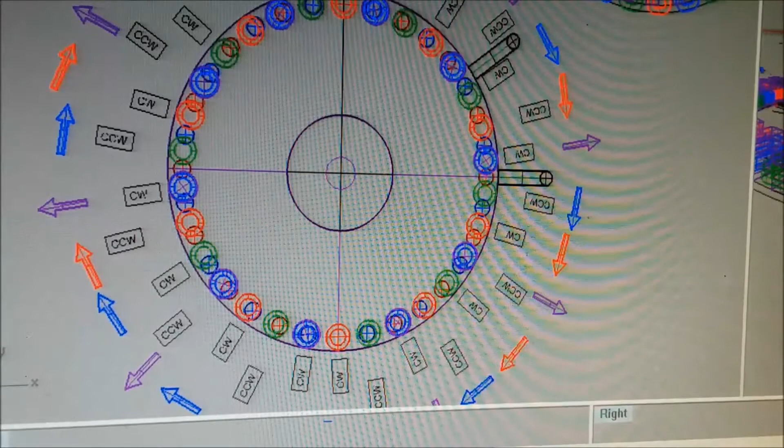Okay. There are a lot of ways that you can connect coils. The easiest is hook it up in three-phase. You buy a three-phase rectifier to turn it into DC. And that won't work to make an AC welder into DC. I've tried that, because it switches internally, and sometimes things are positive and some things are negative. What's the one you can use?

Well, I tell you, if you buy a three-phase bridge, it works, no problem. You can get it for any kind of number of amps you want. Because people are using them in small quantities, the price is kind of high for what you get. It might be $18 or $20 when it really should be $2. But you know, as a percentage of your project, it's not that much.

Other ways to do it. Back in high school, you remember the Wheatstone bridge? It's 4 diodes. The top 2 pointed up and the bottom 2 pointed down. And it's a diamond. You have the 2 wires on either side come out DC, and the 2 wires top to bottom coming in is AC. So it either comes in, goes out this way, or it comes in and goes out that way. And the other, like the negative, does the same thing on the other side.

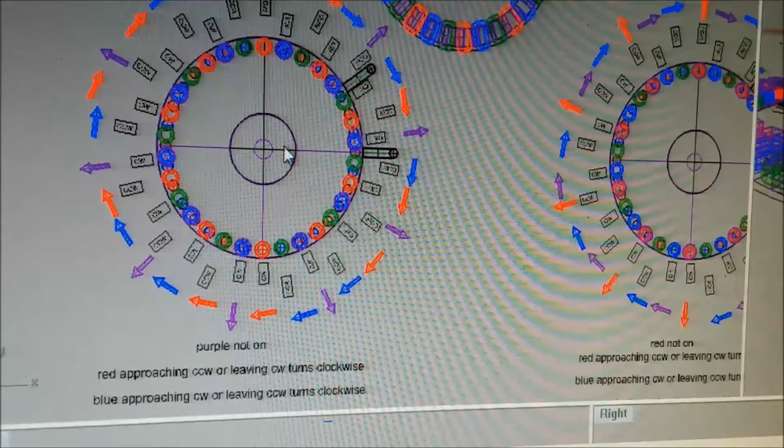And actually, the turbine itself is on 2 Chrysler front hubs, like you use for a van. They're only $16 nowadays if you get them without the toothed wheel for anti-lock brakes. They're kind of obsolete. They're about $40 if you get them with that sensor on them. Still not much. You get 2 sealed ball bearings, a malleable iron housing to mount it with, a 5-bolt flange like you put your wheel on.

I mean, you got holes to bolt it down, and you got something to put your rotor on. What else could you ask for? Put one on either end, you're golden. And you can take a 2.5-ton van and cut a corner with it in town, and the wheels don't fold over. So it's plenty strong enough, and it's cheap enough. I bought a couple spares when I got it.

Anyway, Wheatstone bridges will let you turn whatever the coil is doing into DC. Doesn't do much for you if you're trying to send AC to a 3-phase rectifier, because it's going to be coming in as DC. In fact, you probably wouldn't like it.

But you can wire these rectifiers in series. You have the positive and negative DC coming out. Well, positive of this one goes to the negative of another one. You go right around the wheel and hook them all together into a string, and then you only have 2 wires going to your batteries.

And I'll guarantee, absolutely guarantee, that will make more electricity for the same amount of torque going in than any other way you can do it. I know people don't do it that way, but if you watch this channel, you'll find I do a lot of things other people don't do. It's just the way we roll around here.

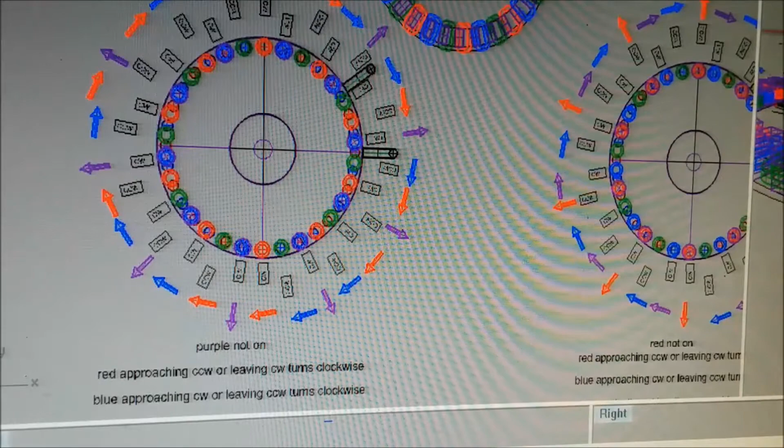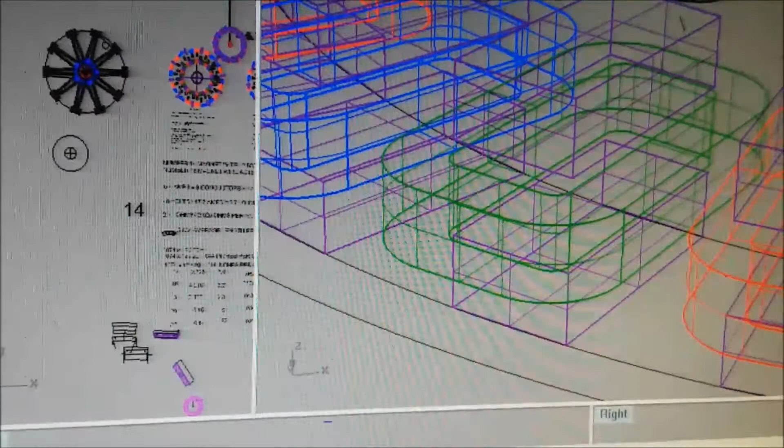This is looking down on my bracket that holds my fan to the ceiling. Let's see. What did I do?

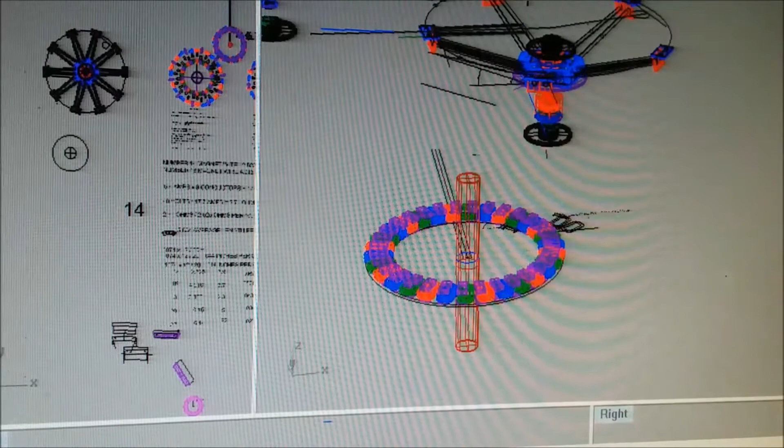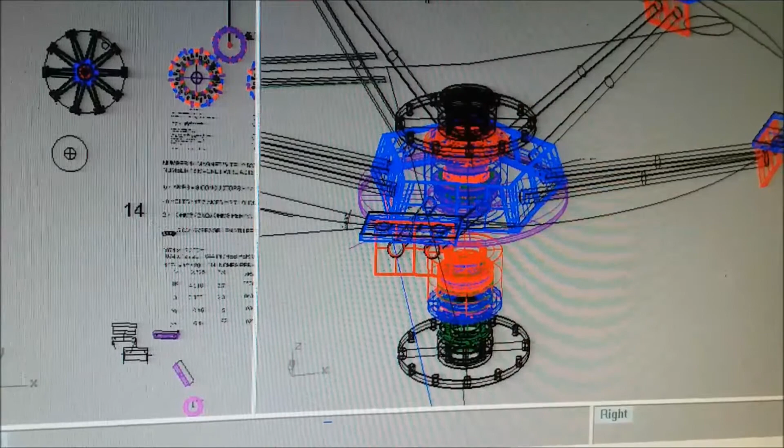Being that these rods were designed to be double nutted, I could line that up in and out, loosen the bolt, slide it left, I could get it bolted to the ceiling. However, no, that's not either.

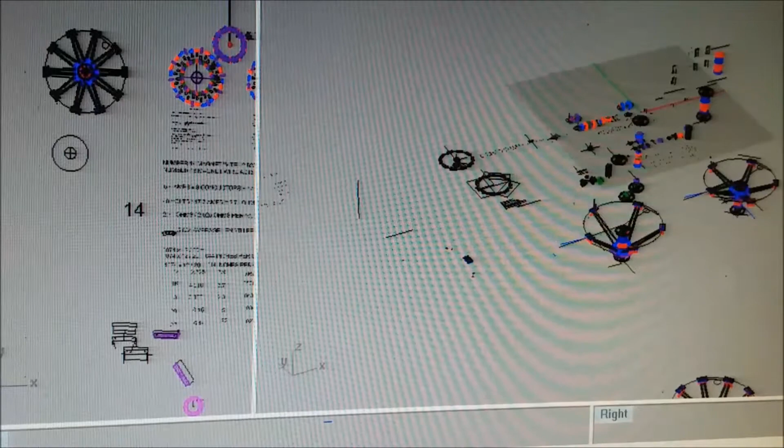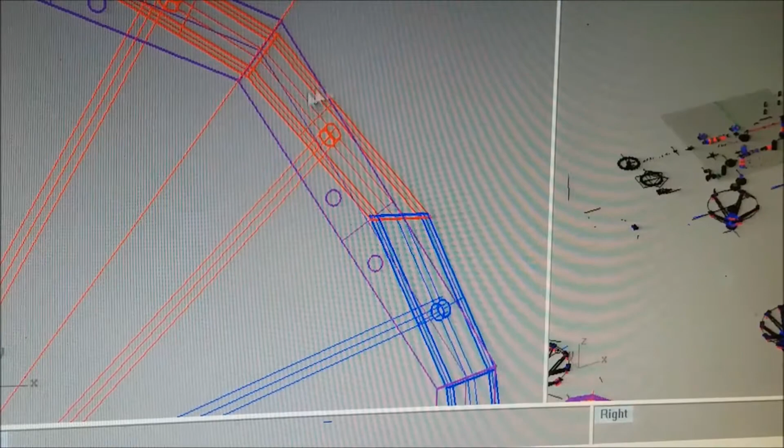The purple things on the top are the part that bolts to the ceiling. They're just made longer till they butt up, and it gets 2 for the upper flange and 2 for the lower flange. Looks real similar. And the flanges, they changed from 5 sides to 10 sides.

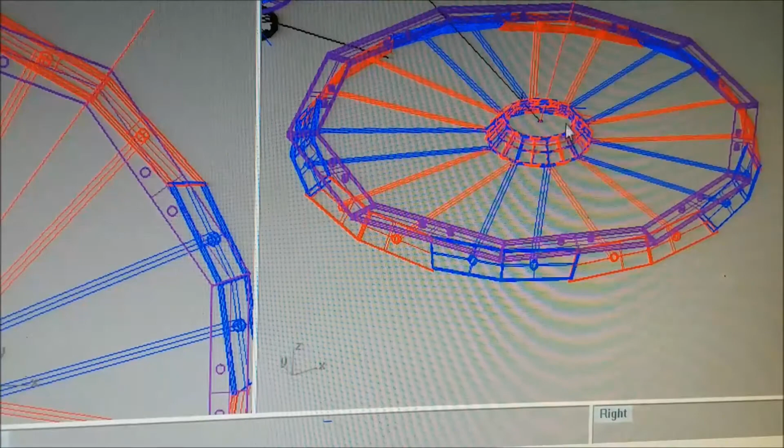Looks much nicer and easier to build because this center hole is bigger where it welds on, and that would be night and day different as far as assembly. We have the skirted things made and all the machine work for the bearing housings except for the grease fitting holes and a few things.

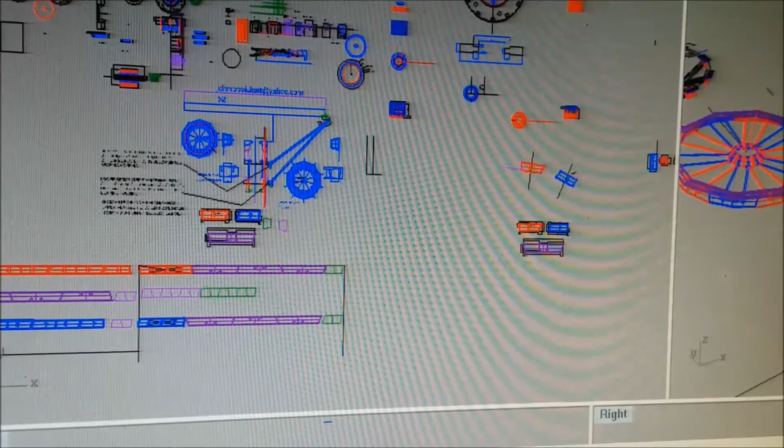This is cross sections of the stuff that makes up the bearing housing up here. It's got a big Timken bearing. That's the inner bearing of a tractor trailer. Turned out that it was about 30% the price of one either side of it because they make so many of them. Same brand, same quality, same construction, same materials, just a slightly different size. And you're making the housing, you pick the cheap bearing and buy a spare.

And because this fan blade is pushing up, the air is trying to push the blade down, and that's why the big bearing's on the top. There's another Timken bearing down here because you have to have Timkens in pairs to keep them loaded into the race so it won't just walk out of the race.

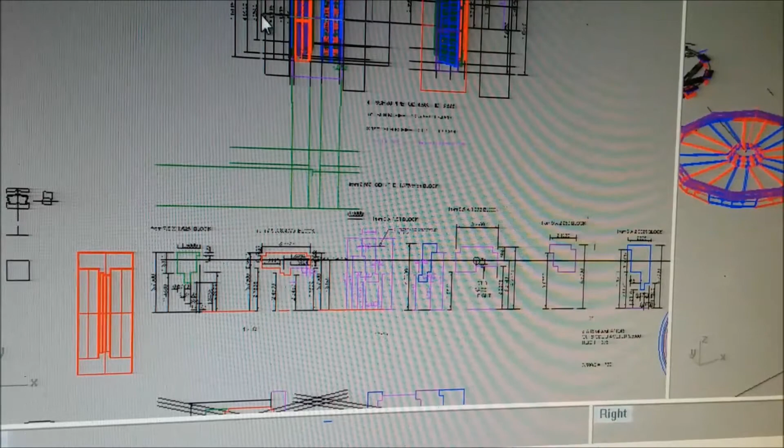And there's a sleeve on here with 2 W nuts, around 2 3/4 shaft size at that point, with a locking tab that you bend over into one of 4 slots on the nut. Same thing at the bottom, except there's no locking nuts. The shaft has got a step in it because this bearing goes on from the other end. And there's also a spherical bearing down here that takes the radial loads.

Things left to do are drill a hole through here where the 2 lines are, and put a grease fitting with a metal pipe up through the roof. And when you put grease into a Timken bearing, it climbs into the rollers and tries to get out the other side. So what you put in will flush out any surplus grease and put the fresh in place of it. And it will only take what it needs.

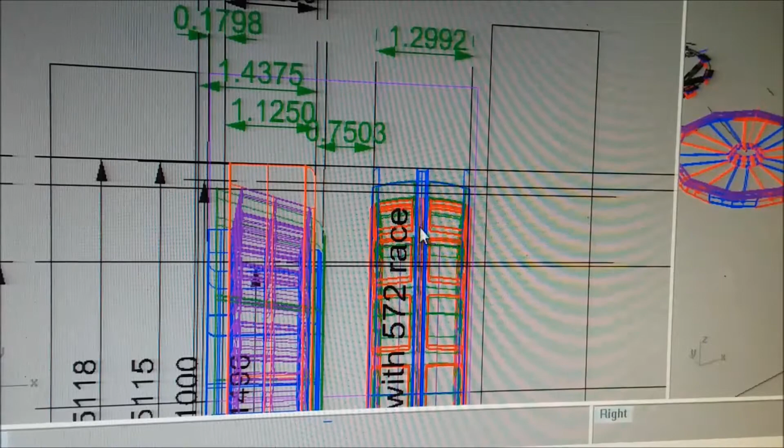A spherical, it's all trying to get back to the center. So they come with a groove around them. So we're going to drill right into here, put the grease fitting, and put it through the grease groove that's made for the grease. Fancy that. We're going to actually use something the way the manufacturer intended it.

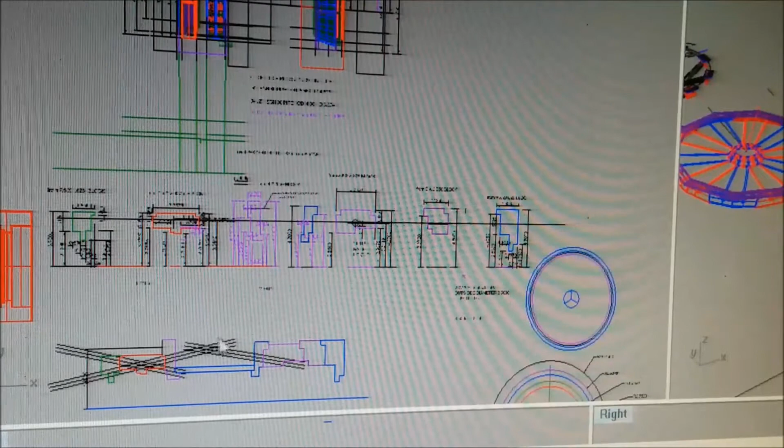The reason for all these pieces is you have to slide things in from the end, like bearings have to go in and, you know, somehow get in there. The other is you can buy from Blue Metals, you can buy pieces of ship propellers and stuff that they've chopped up. Also, when they take new material, the first part that goes into the rolls when they're rolling or forging that material may have a different grain structure than the rest of it, which could be 80 feet long.

So they'll take a 2-inch cut off the end to get it where it covers the entire diameter, and then they'll just lop off some amount, anywhere from 1 inch to about 7 inches. And at the other end, they take a cleanup cut, and whatever's left, they chop that off. So you get all kinds of different lengths available. It's hard to buy mild steel from those people.

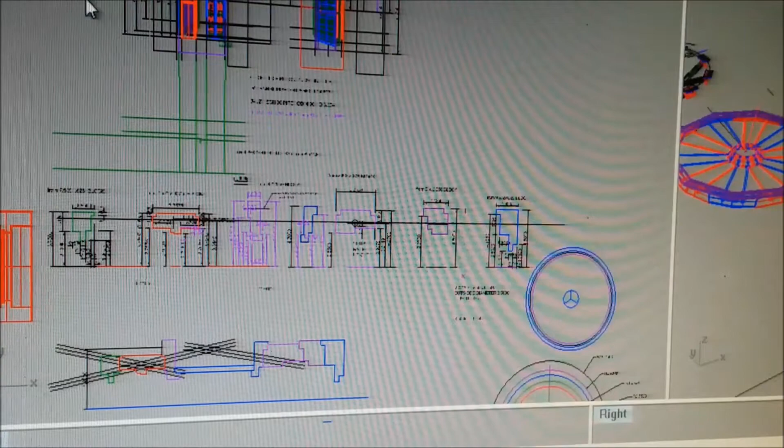But these pieces are 4340 and 4140, and stainless steel 316, and one of them is aluminum up here. It holds a grease seal. All the weight's going that way. This one down here is stainless steel, and like I say, these pieces are all made. Got them made in the Philippines, and he did a great job.

The flange that the fan blades are going to bolt to, they bolt to these holes out here. These holes are drilled, but I'm only going to use the outer ones because the fan blade goes clear across. And this is a size E hub also, with a quick detachable hub on it. And the hubs are phased so that the open hole on the other one is here, so you can thread a bolt from that side into this. And this one, you'll be able to thread a bolt from this side into the hub on the other side. So when you tighten the bolts, it pulls all of it together.

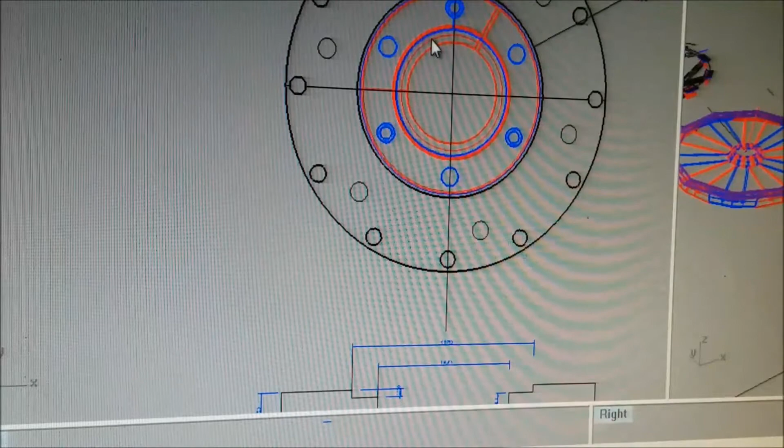Just worked out that way. Some brands, these haven't got equal spacing. They only have 2 pusher holes, so the patterns are offset. I got lucky. I got some that the 6 holes are all, you know, phased the same amount.

Just like high school. You know, they call it laws of physics. It's not a suggestion. Suggestions, you have a little leeway. If it's a law of physics, no choice. It only works one way.

Anyway, you can put 1 phase down, see what's happening. You know, as for insight into how these things are wired internally, Electro Noobs. N-O-O-B-S, Electro Noobs with an S on the end.

He's got all kinds of electronic projects, mostly all electronic, some mechanical. He's into drones and RC airplanes and motors in general. And he's got a real good explanation on how to drive motors and whether you want the MOSFETs or the other two choices I don't want to get into right now.

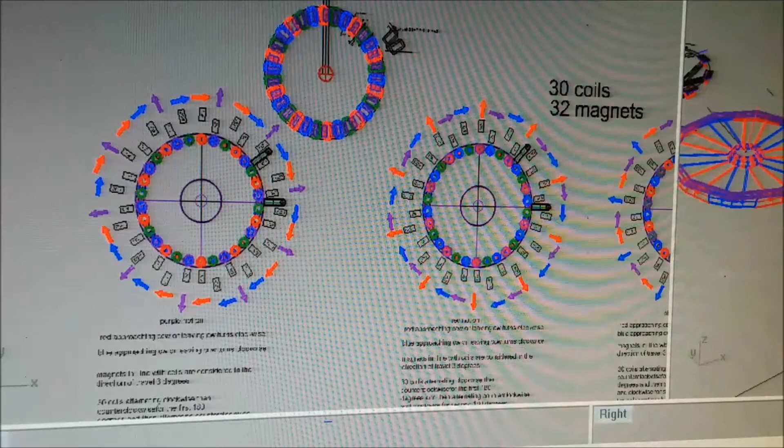You can't violate that. That's why you might have a motor that draws 6 amps and you've got a 300 amp capacity MOSFET driving it, or 4 of them in parallel driving it, because you can't violate the thermal part of it. So draw your thing, count how many coils you got in each phase, and you're going to go in on one set, out on the other. So the number of coils in 2 phases is what you're trying to figure your wire for.

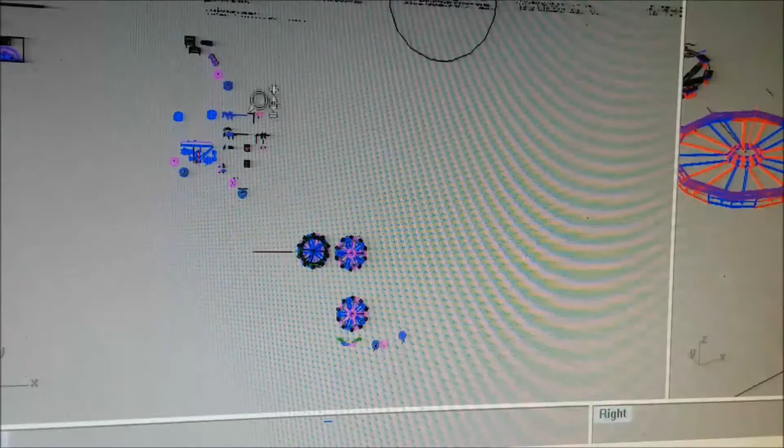There's a chart. Wait a minute, if I don't go too far, it won't do a redraw. This chart's got 40 lines in it. This is getting down near the bigger stuff, but there's a lot of them going the other way. A lot of ceiling fans are like AWG 35.

So you pick an AWG wire gauge, ohms per 1,000 feet, amps that wire will carry, and the diameter of the wire. You do your calculations for the one that you think is right, and then do one on either side of it. If the one on the other side looks like it might be close or maybe better, do one more. Get the one you really want in the middle and see what happens on either side. These wires come in 16, 17, 18, 19, 20, 21, 22. There's some not drawn in here. I can zero in on it because I haven't bought the magnet wire yet.

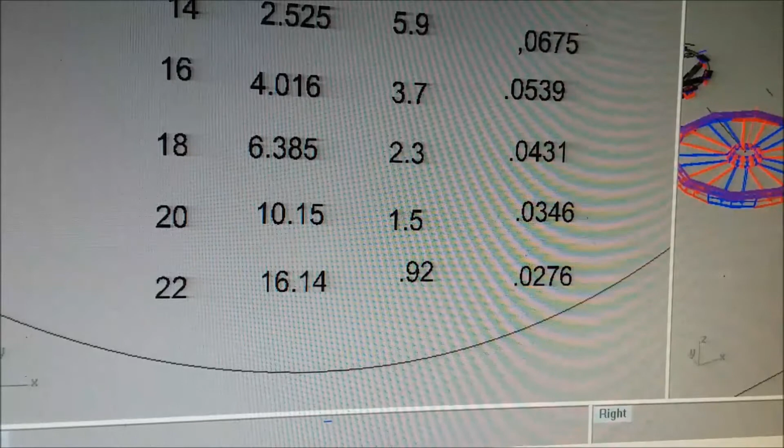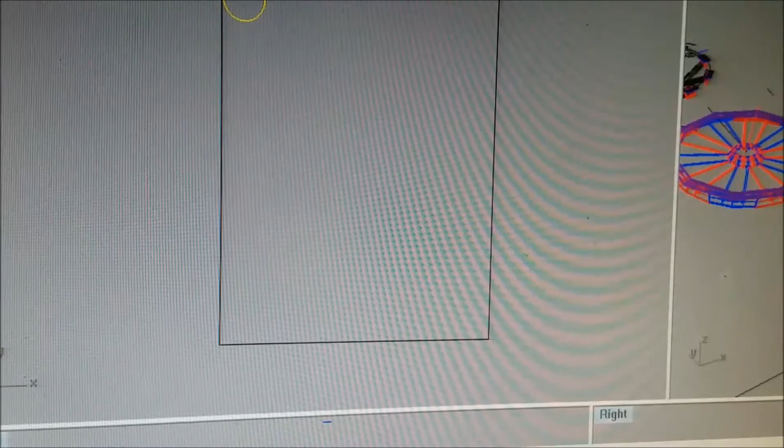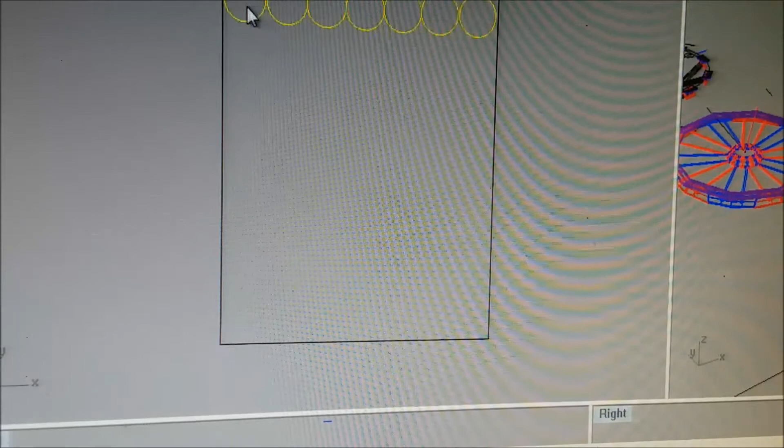Oh, what I was going to tell you. Say I draw the cross section of my coil, and I can make a scale wire. I'm doing it this way because if you were using a ruler on a piece of paper, you would probably do it this way. Left to right. That wasn't very well placed. Anyway, you can count how many wraps times your inches per wrap goes in the coil with different wire diameters.

And of course, you may be running this as, you know, a pair. Excuse me. It does what I tell it to do, I just don't tell it right.

You may be running 2 wires to get the amp capacity you need. But the linear resistance only counts on one of however many you got, because with 2 wires each carries half, and that only gives you half the resistance for each one, so it adds up to the same thing. So if you're running parallel conductors, you can only count wraps on one.

But especially if you have something like the free 2D version of Google SketchUp, you can draw stuff like this all day long. This is an array. It's so many wide, so many tall, and the spacing would be the diameter of the wire, and have at it. You can make an array and then draw your box around it and see how much it cuts into. I got lucky here. That doesn't happen.

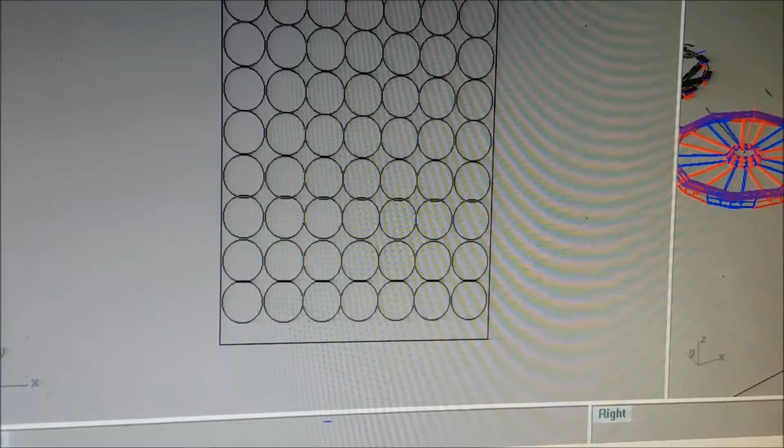Okay, amps times conductors, total amps. Volts divided by the total amps gives you ohms. Ohms divided by the ohms per 1,000 feet of the magnet wire gives you it in feet. So this is the feet of wire you have to have. You're dispersing it amongst 10 coils in and 10 coils out. For me, that's 20 coils. Comes out in feet. Feet times 12 is inches. And the inches divided by the average in a turn gives you the number of wraps you have to have for each one. And of course, you got to remember you put 6 in up here, so you have to have 6 wires going into your coil winder.

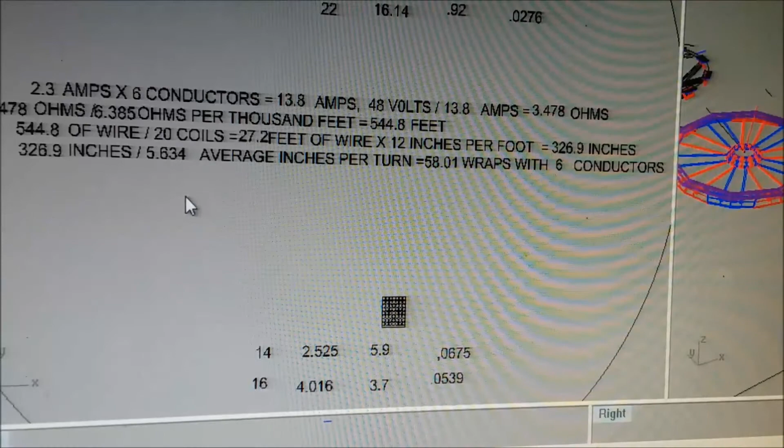And then the lawyers started suing everybody over everything, and that went away, and the go-kart track went away, and the skating rink went away, and actually the movie theater went away in our town. It caught some kids doing the dirty down between the seats, and the police shut it down. The Boy Scouts went away. They just sued everything in our town. And of course, the lawyers didn't live in the town. They lived in D.C. or someplace.

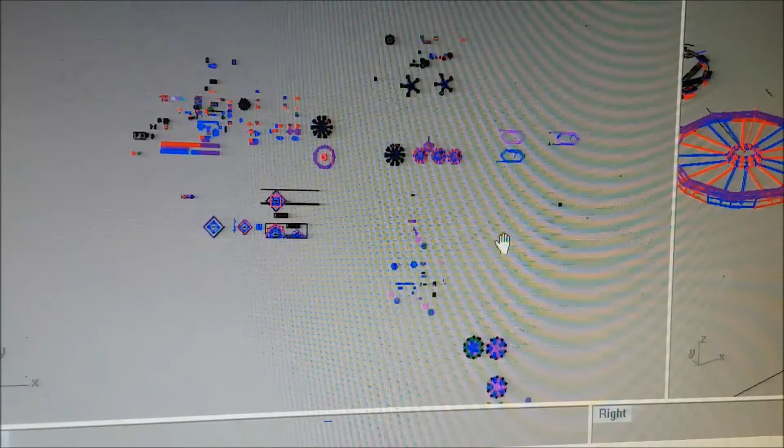I don't think there's anything else that's totally interesting here, except my shopping list. Okay.